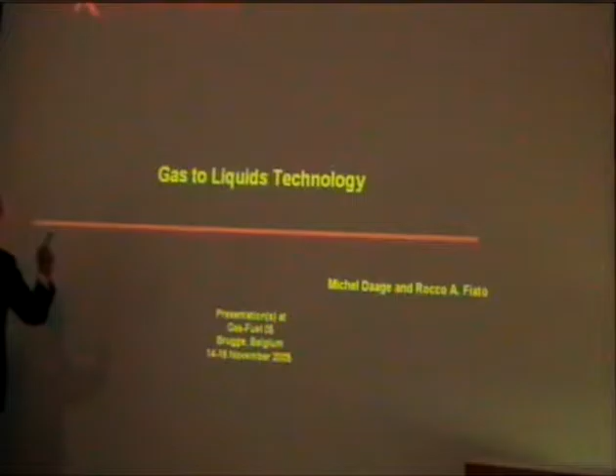I would like to acknowledge my co-author, Fiato, who has been quite a bit on the circuit talking about the work we are doing in gas to liquid technology. I would also like to thank Theo Fleisch this morning because he covered a lot of the introductory material that I needed to look at, and he's going to simplify my job today.

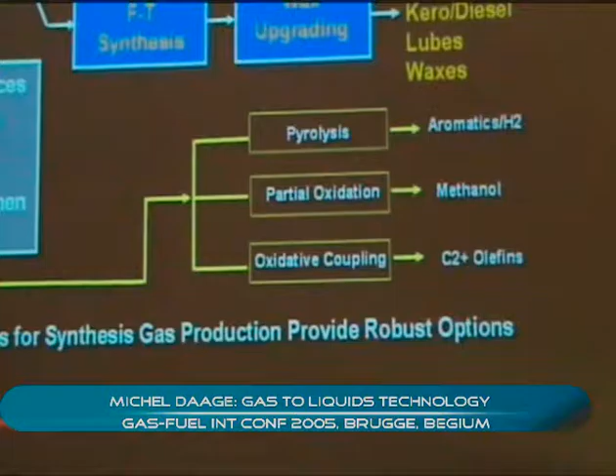This first slide, in fact, is one of his last slides. I use it to show you that essentially the conversion of gas relies on the first step, which is the partial oxidation to form the syngas. One of the big advantages in the conversion is the fact that this common intermediate in the technology is very flexible and can utilize different carbon sources.

The alternatives from that syngas are two major options. One is methanol synthesis and the manufacturing of petrochemicals, which I'm not going to cover today. We heard quite a bit about that yesterday and this morning.

The other alternative is the Fischer-Tropsch synthesis and wax upgrading, which essentially target the production of fuels and lubricants, the area of interest to ExxonMobil, and this is what I'm going to cover this morning. Finally, there is direct activation of methane, but at this point it's way too early to even approach reasonable economics, so I'm not going to discuss that approach today.

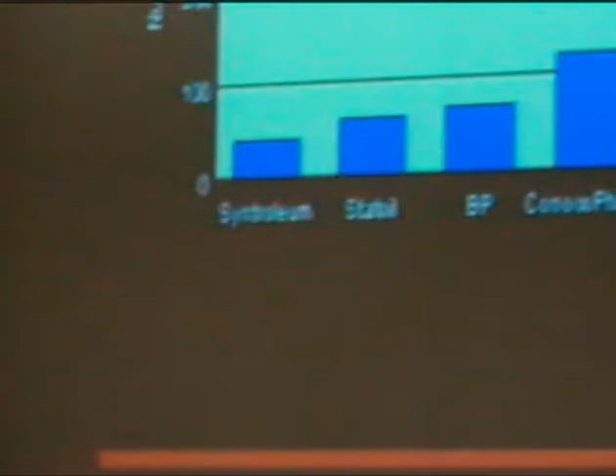When you look at the GTL technology, the thing that is really critical here, and I would like to emphasize, is the importance of improving technology. This is a requirement for obtaining attractive economics, and a lot of work has been done in that area.

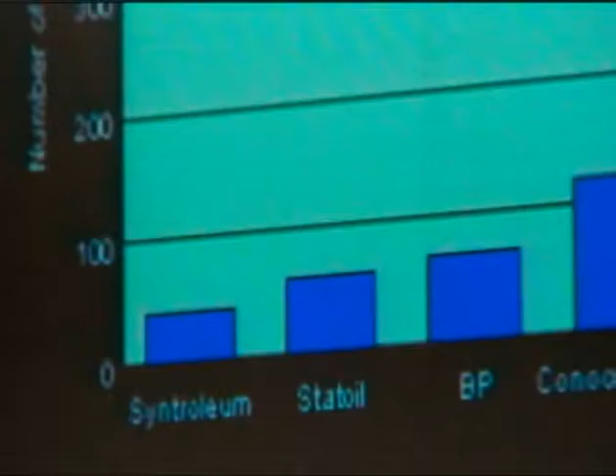In fact, the industry, we estimate that since the 1980s, more than $2.3 billion have been spent developing that technology. This shows you how important it is to the economics and how we can achieve commercialization of gas to liquid technology. It is a highly competitive environment.

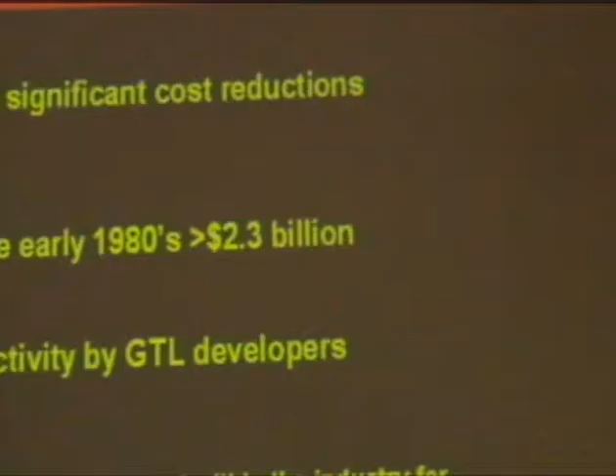You don't spend that kind of money if you don't believe that there is a lot of money to be made, and everybody wants a piece of the pie.

The chart that you see here at the bottom shows you the activity related to patents, and you can see there is a large number of patents, and ExxonMobil is the major holder of this intellectual property.

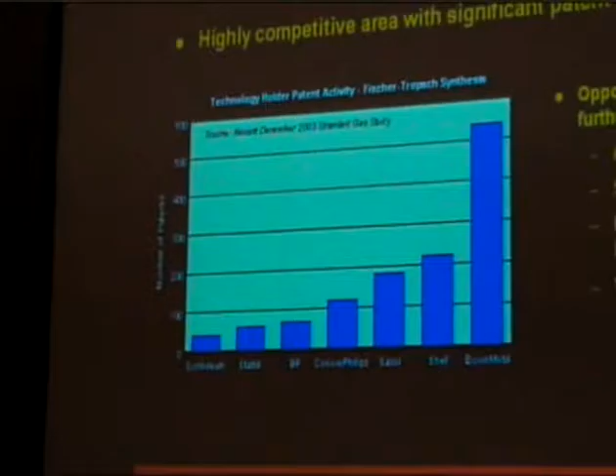The industry has widely discussed, argued, and tried to secure improvements to the technology. There are many opportunities that have been identified, especially in the case of air separation, which is critical for the production of syngas.

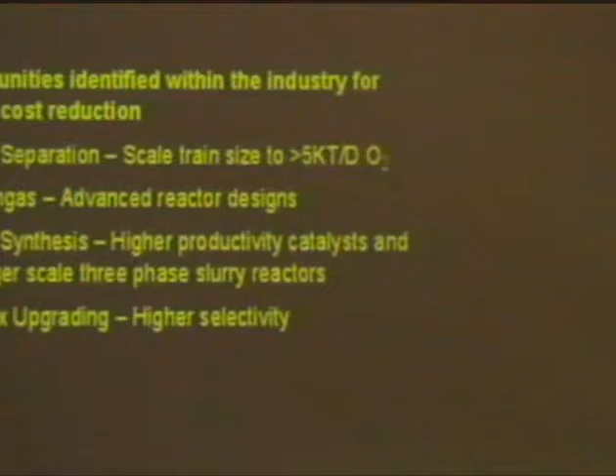On the syngas side, you heard Topsoe describe the ATR. There are other groups that are looking at advanced reactor design, and that area is also extremely competitive, even though there are many competitors and companies available out there.

On the Fischer-Tropsch synthesis, the key, as we believe, is related to obtaining a high productivity catalyst and the ability to use very large-scale three-phase slurry reactors. I'm going to talk a little bit more about that.

And finally, in order to make a product that you can sell, you need to upgrade that wax, because the wax market is very small. Just to give you an idea, on a large GTL plant, a leak on a flange is enough to cover the production of the whole wax market in the US.

So you see, you're not going to commercialize the wax, you're going to need to transform it into a very large volume product, and that's where the fuels and lubricants come into play. In the wax upgrading, what is really essential is obtaining high selectivity. Obviously, you don't want to go back to methane, because you would have wasted a lot of money doing that.

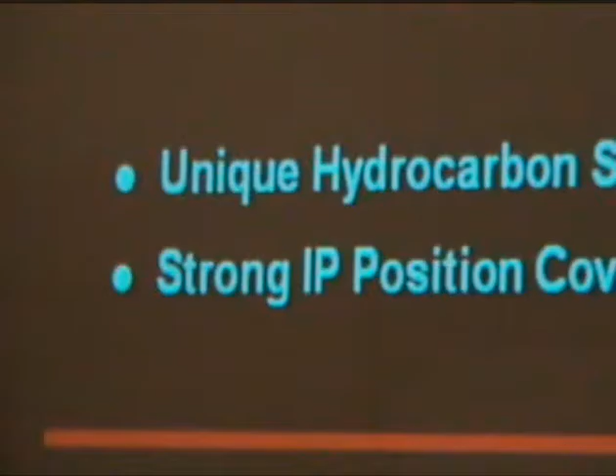The second step is the Fischer-Tropsch, where you take the syngas and convert it to a waxy material. You can see from the schematic that we're using a slurry reactor, designed specifically to manage the heat because of the high exothermic reaction that occurs in this vessel. We produce a high molecular weight wax out of this reactor using both a proprietary reactor design as well as a proprietary catalyst, and I'm going to give you a little more detail on that.

This is then followed up by an upgrading step, which resembles to some extent a hydrocracking or hydroisomerization, commonly used for the manufacturing of lubricants, even from conventional fuels. And essentially the products that we're going to make are fuels, diesel, some naphtha, lubes, which have a higher value than the fuels themselves, and obviously opportunity for some specialties such as solvents in here.

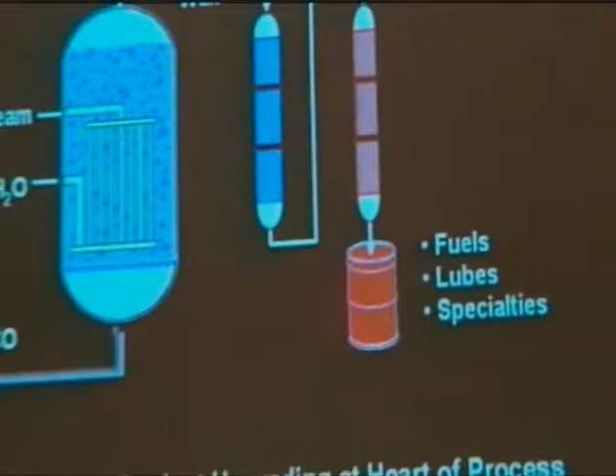The uniqueness of the process that Exxon is using is really tied to both steps here, which is the use of the slurry reactor for the Fischer-Tropsch synthesis, as well as the upgrading, and the company possesses a very strong IP position in that area, which covers 3 things: the catalyst, the process itself, and also the product composition.

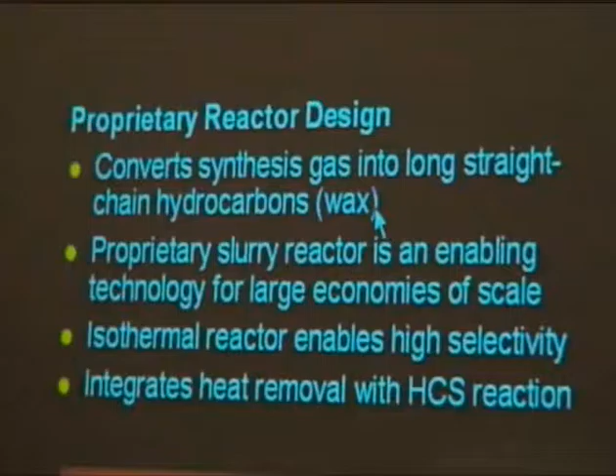Let me focus a little bit more on the Fischer-Tropsch synthesis. We use a proprietary reactor design, and in that step we convert synthesis gas into long straight-chain paraffins, essentially wax. It's a very clean product, white, a beautiful candle. If you had the chance to see this, it's really pretty amazing to see the kind of material that you make out of this.

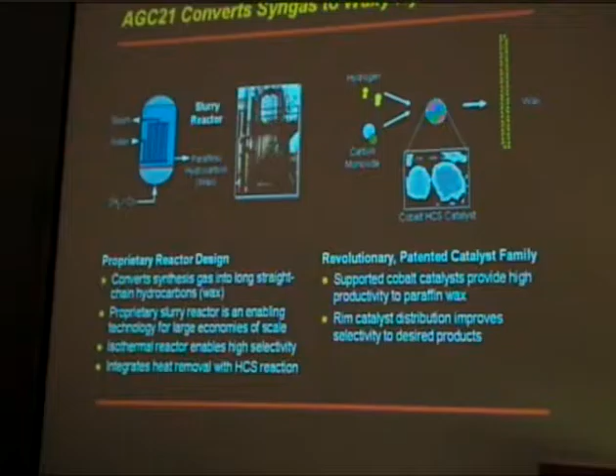The slurry reactor that we use is essentially enabling the technology for our large economy of scale, and that is where the slurry presents a significant advantage. It is an isothermal reactor, and it enables us to control the selectivity of the reaction and essentially produce a very high quality wax. The key element of this slurry is controlling the hydrodynamics in the reactor.

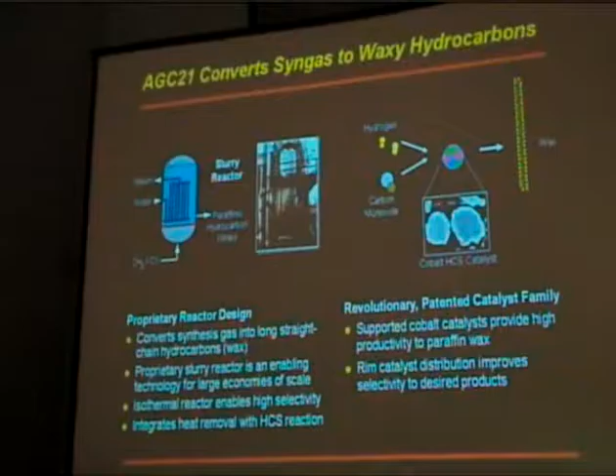That is tied to the formulation of the catalyst and its morphology, and also controlling the heat removal, which the liquid phase allows for very good high heat transfer capability in the reactor, where we remove the heat by evaporating the water, shown here on the reactor on these grids of tubes that are inserted inside the reactor.

On the catalyst side of it, you have here a cartoon representation of the chemistry. I don't think that anybody finds this maybe informative, but not that exciting. The key element is really the cobalt HCS catalyst, which is represented here.

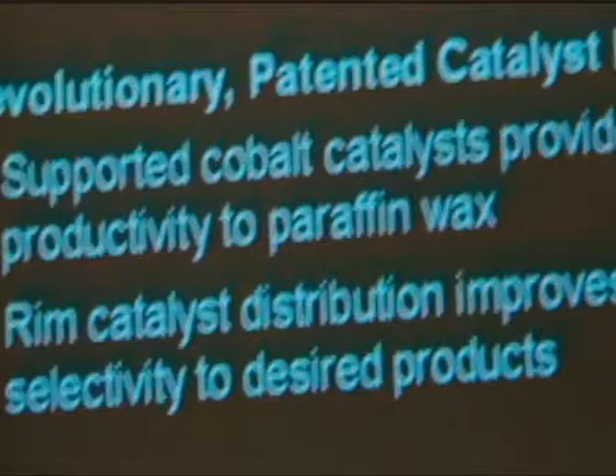We believe our catalyst is revolutionary and it's highly patented. It is a supported cobalt catalyst that provides a high productivity to paraffin wax. And this is really essential to your economics.

So it's a very sophisticated system, and in particular you will notice that this catalyst, we call them rim catalysts, it's a distribution of the cobalt distributed in the particle, which in fact allows you to control the selectivity of the reaction. You can see here the light layer around there is where the cobalt is distributed in the catalyst, from that particular catalyst.

Why is this so important in the design of this catalyst? It's because if you try to study the effect of the thickness of that layer of cobalt in the catalyst particle, what you're going to notice is that the thickness that you need to use in the catalyst depends on the productivity of the catalyst.

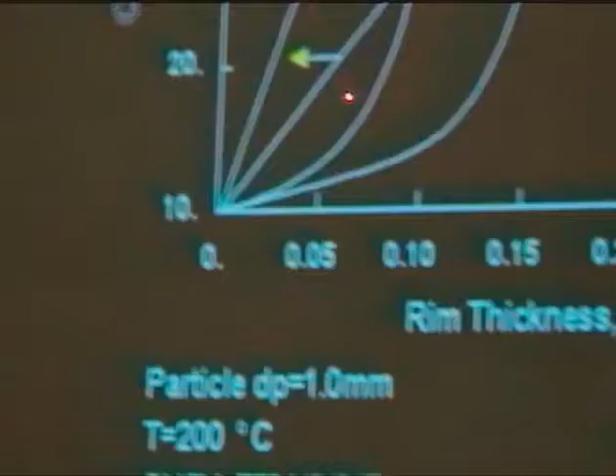If you have a low productivity catalyst, which is this line here, on yellow, you will notice this is your production of C5 plus materials, and here you have the methane selectivity. You can see it's somewhat delayed with the thickness, but catches up very rapidly and increases rapidly. Here you're making in excess of 9% methane, and every percent of methane that you make is a waste of money, because that's what you started with in the first place.

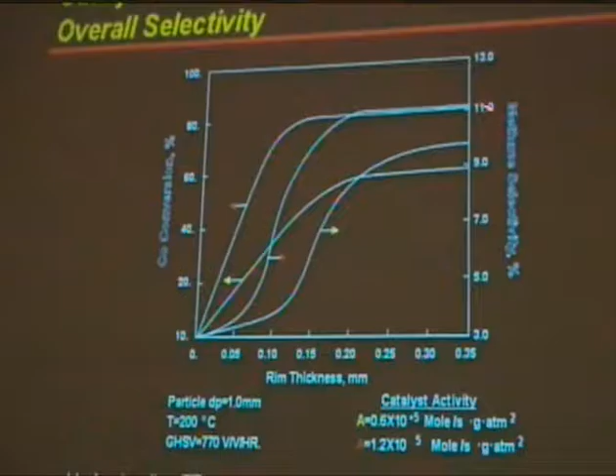If now you try to increase the productivity of the catalyst, which you see with this curve here, on a high productivity catalyst, you will notice that the methane catches up much faster and the yield becomes higher. Then you notice that you need to control the thickness of that layer in order to maintain the high selectivity in your process.

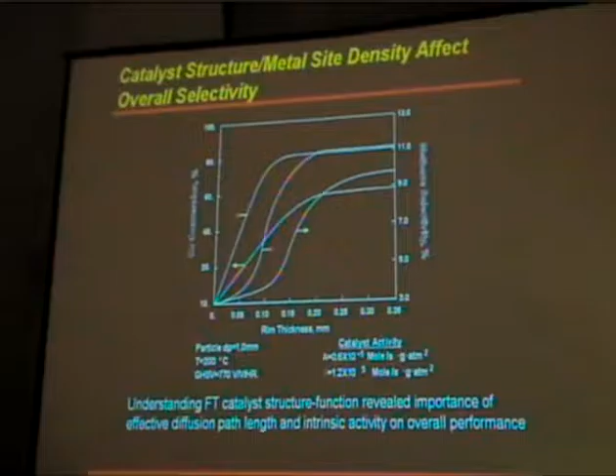So understanding the Fischer-Tropsch catalyst structure and function is really essential, and it is related to the effective diffusion path length and the intrinsic activity of the catalyst. This is an effect that is very often ignored in the formulation of catalysts, and it's really critical.

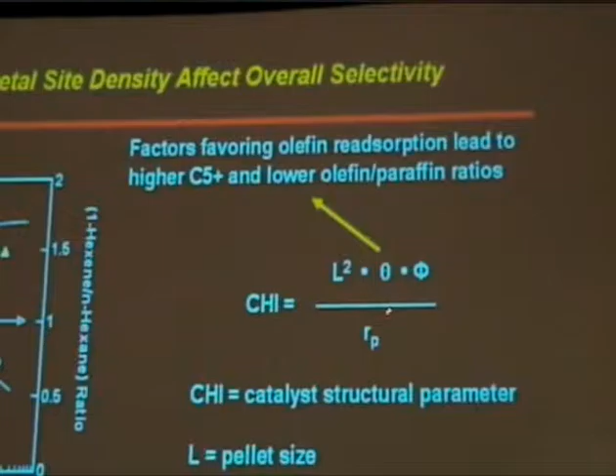Another way to look at it is to look at what ExxonMobil has defined as the chi factor, which is represented here. That has to do with the morphology of the catalyst, the activity of the cobalt, the volume of the particle, and the size of the pore.

If you look at it as a plot as a function of the value of chi, you want this value to be as high as possible. What you notice is that the selectivity in C5 plus increases dramatically, can be up to 90%, and at the same time your ratio of olefin to paraffin decreases.

This is because in this regime, you're allowing for the readsorption of the olefin, which allows them to grow again in molecular weight and increase the overall yield into the wax.

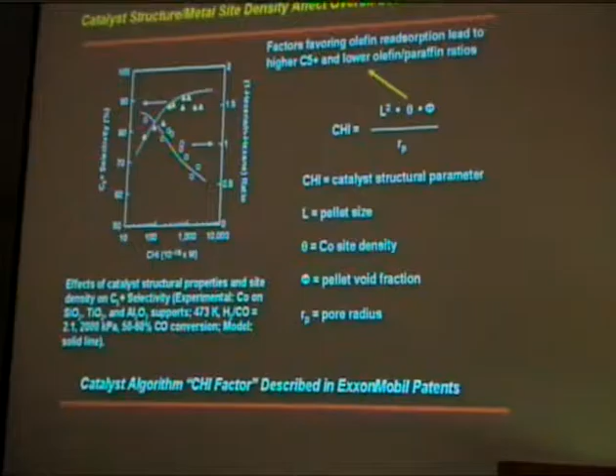The essential issue here is really to control the diffusion path, and in a high conversion regime, what happens is toward the center of the particle, if you still have cobalt, you have a hydrogen-rich environment, which leads you to the formation of methane, and that's what you try to get around.

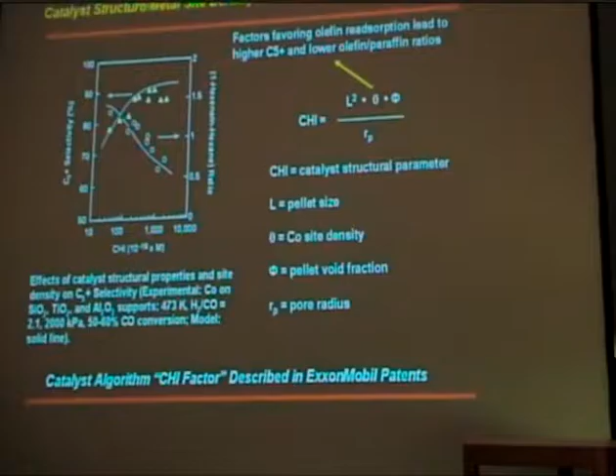The important thing about this chi factor is that Exxon has patented an algorithm related to it, and it is well described. I'm going to refer you to this literature if you want to know more, because I do not have the time to describe this effect further.

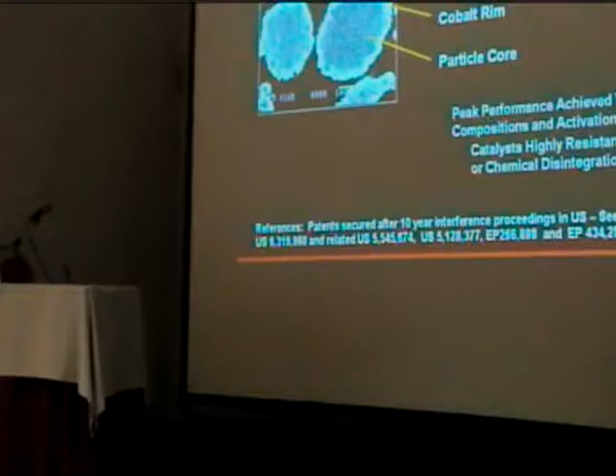Here is a picture of the catalyst that I was showing you before, which shows this rim here. I'm going to repeat a bit what I just said, which is that the cobalt rim helps minimize the methane formation, and it's obviously important in the economics.

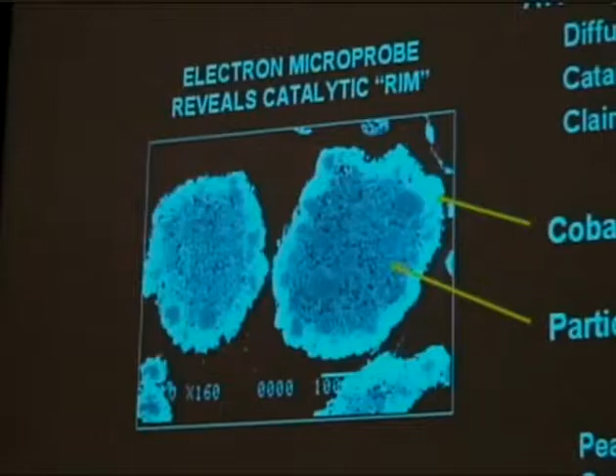It's related to the relative diffusion of hydrogen versus CO, especially when you get to the high conversion regime per pass, which impacts the economics because you minimize recycling. It also helps you manage heat control in the particle because of the exothermic reaction.

One of the things is the eggshell composition. Let me make one point: my colleague has spent a lot of time on these patents, which have been challenged by the industry quite a bit. I want to emphasize that these patents have been upheld after 10 years of interference, and ExxonMobil does control this issue on the rim catalyst.

It's very important to recognize that the definition of a rim has nothing to do with any particular shape, it applies to any shape of catalyst particle that you will use. You can use trilobes or even powders, and the rim is independent of the shape.

Another characteristic we look at in the catalyst is attrition resistance, obviously, because we are using a slurry reactor, and chemical disintegration would create a corrosion problem in a slurry reactor.

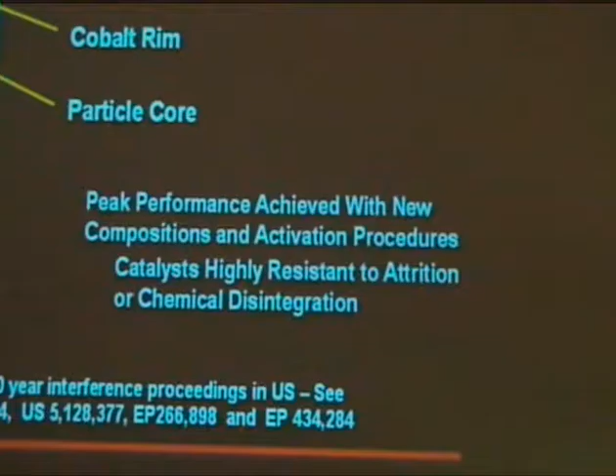Let me now switch a little bit to the issue of the products, because really what all this technology is about is making a product that you can market and sell.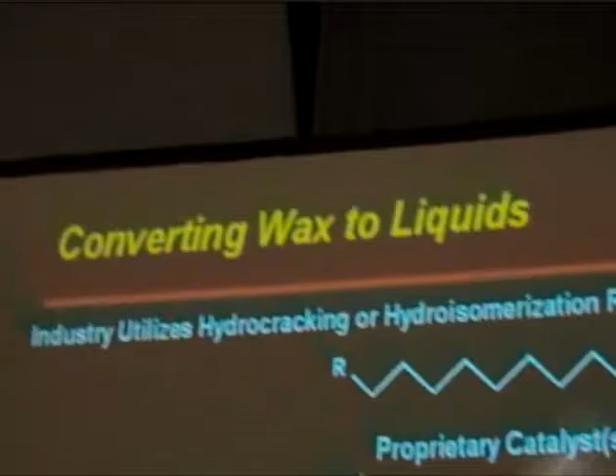The key thing is when you make wax, wax is not a market that is large enough for us to operate. What I did here is put a very simple cartoon to explain what we're trying to do in those plants. If you look at this linear molecule as being a wax, by the way, I'm a chemist, okay, just in case that explains the cartoons.

We use a series of proprietary catalysts that are essentially bifunctional catalysts, like metals on solid acids, and you change the morphology, property, and function of those catalysts in order to tailor the product that you make.

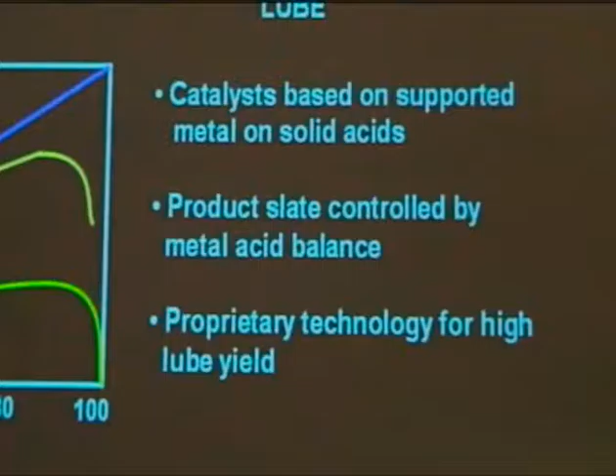In one particular case, you're going to try to favor not only an isomerization reaction but also a cracking reaction, acid cracking, so that you can control the molecular weight of the product. In this particular case, you're going to try to make diesel.

In the other cases, you're going to avoid the cracking and instead isomerize the molecule by adding branches to those chains. Those branches are going to be relatively short. It's very difficult to put long branches on these molecules.

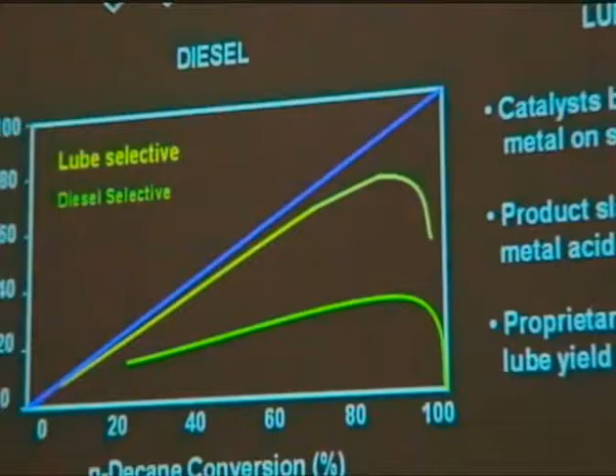When you do this, you're getting products that are in the lube range, okay? The properties you're looking for are very different. They have to do with viscosity, VI, and pour point, and for anybody involved in catalysis, it's a weird process to work on because everything is driven by physical properties, not by conversion.

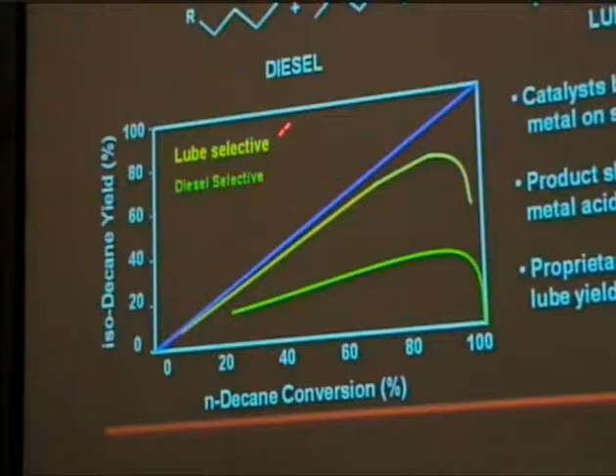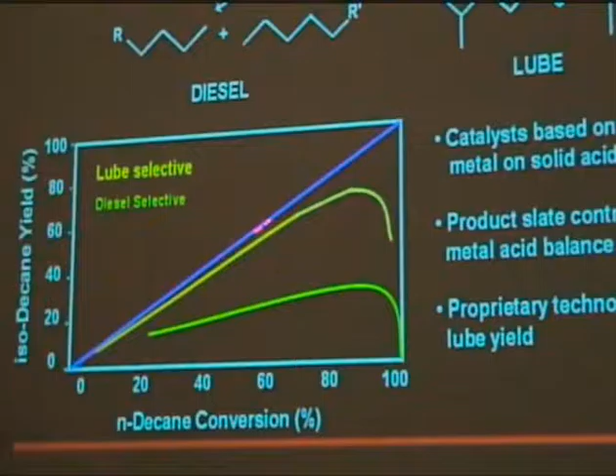Here's an example of how you select the catalyst to produce diesel or lubricants. This could be a bench scale experiment. You look at n-decane conversions for the feed used, and the production of iso-decanes, essentially methylnonane and dimethyloctanes. The purple line is the ideal conversion. You can see we're using two different catalysts with some isomerization capability, but we lose a lot of the molecules here by cracking.

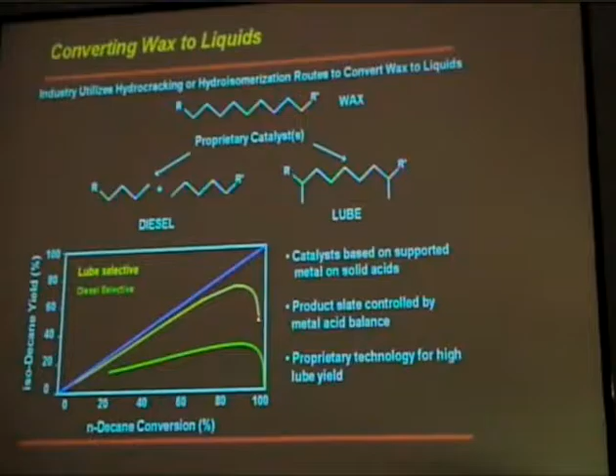So we're making lower molecular weight product. When you try to make the lube, we try to maintain the molecular weight, and we use this type of catalyst.

Let me talk a little bit about the lubes and what we're trying to achieve. May I get a glass of water?

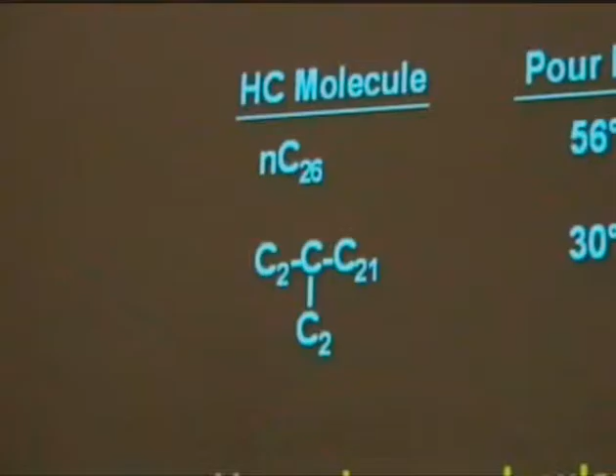In the isomerization process, what we try to do is modify the linear paraffin. Here's an example with a C26 molecule. We try to add a small branch to this molecule, and when you do this, the pour point of your lubricant changes, going from 56 degrees C down to 30 degrees. The VI doesn't change. That is the kind of reaction that gives you the lubricity.

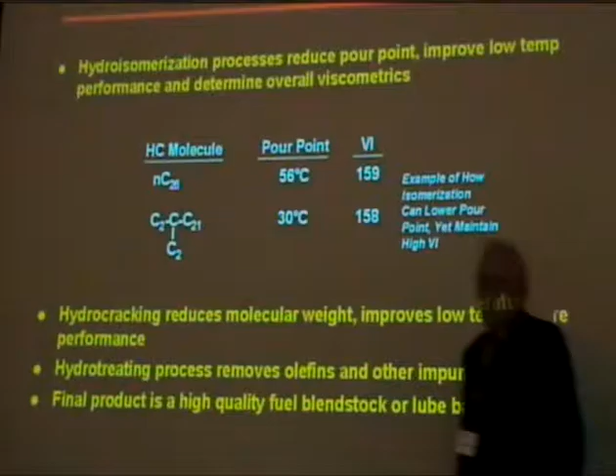And really that is what we're trying to achieve. This is very critical to be able to control the performance of those products.

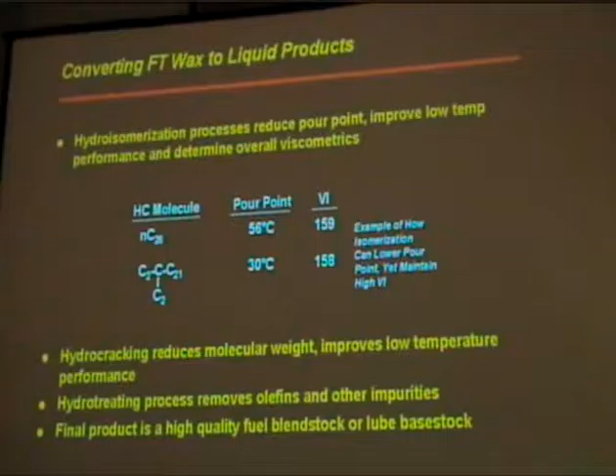In the case of diesel, what we do is hydrocracking, reducing the molecular weight and improving low temperature performance. Low temperature performance is a critical item for both diesel and lube products. One reason is if you live in a cold country, when you start the car in the morning, you don't want the crankcase to have a candle in there. That's exactly why people worry about this type of property, because if the lube solidifies, you cannot start the car.

In both of these processes, you have to add another step, a hydrotreating or hydro-finishing process, in which at a low temperature you hydrogenate the residual olefins and eventually oxygenates in some cases. You do this to stabilize the product, because you have to store it, transport it, and deliver it at the pump, and if oxidation occurs, you have a product that is not acceptable to the market.

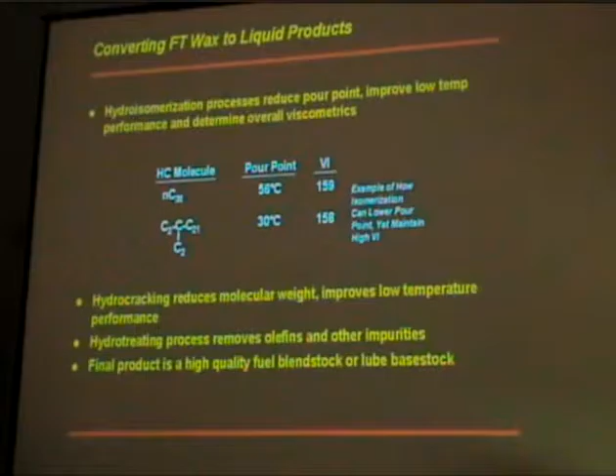At the end, the final product we make, both diesel and lubes, is a high quality blend stock material, because it comes down to formulation. Very rarely do you produce a lube that is a single base oil. It is typically a blend to which you adjust the viscosity to meet the market. So don't look at it as a final product from the GTL. It is a blend stock, especially in the lube business.

This chart shows the evolution of technology in lubricants, and I decided to include this because in many of the conferences we attend, very rarely do we talk about lubricants and lube base oil. The history here is very interesting. In the very early days, lubes were recovered from the barrel of oil through acid and clay treating, and the size of the trains were very small, up to 5 kBD.

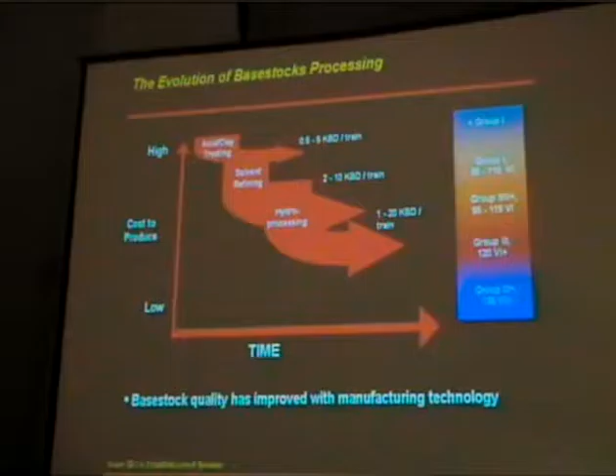In about the 1930s, the technology evolved to solvent refining, and that is what the large capacity plants use today. We produce Group 1 all over the world, including heavy base oil, industrial oils, and that kind of thing. In more recent years, hydroprocessing has been incorporated into that scheme.

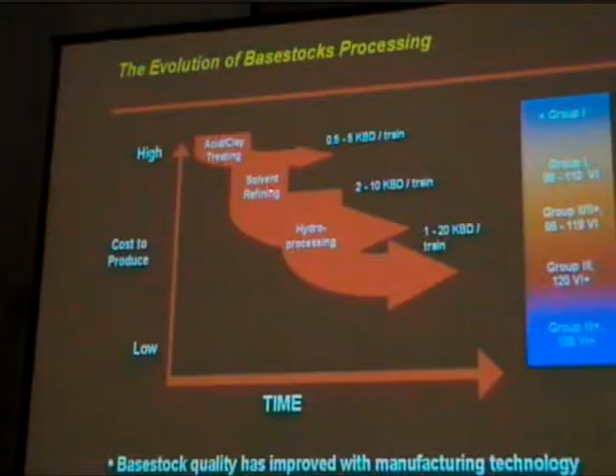What you do here is saturate the aromatics. When you switch from solvent refining to a hydroprocess system, you move from a Group 1 lubricant to a Group 2 and Group 2 plus. The major difference is you start to increase the VI and decrease the sulfur content of the lubricants, and that is also driven by environmental regulation.

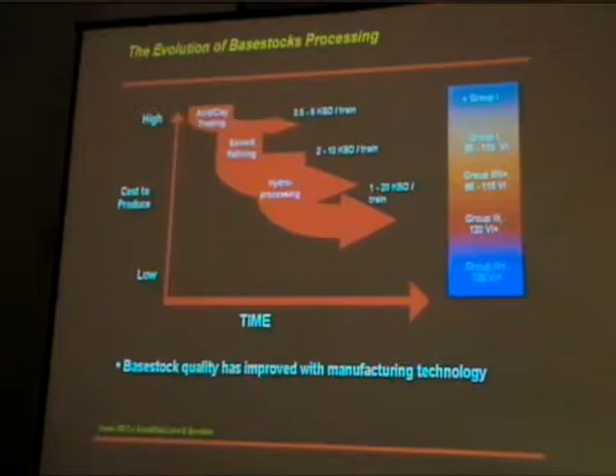Believe it or not, when you talk about less sulfur in fuels, the sulfur that exists in a lubricant starts to be a factor. This shows how deep the control of regulation impacts the fuel and lube industry. Finally, the most recent development, happening in the 90s, is essentially all-catalytic plants that have allowed the production of Group 3, which is very high VI, above 120, and essentially no sulfur.

And this is where most of the investment in industrial lube is being done today. So what is next and where does GTL fit? It fits right there. It is the next technology, and that is the highest quality lube base oil that you're going to be able to manufacture out of GTL.

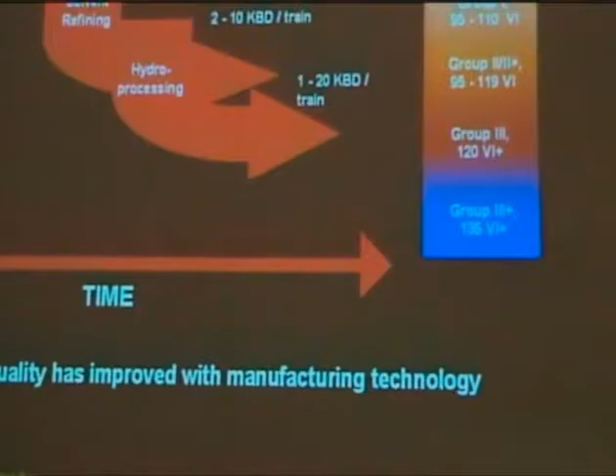So it is the next generation lubricants. And you can see here that I describe it as a Group 3 plus, 135 VI. This becomes competitive with the polyalpha olefin business, and the big advantage is this is a much cheaper technology to produce that kind of material.

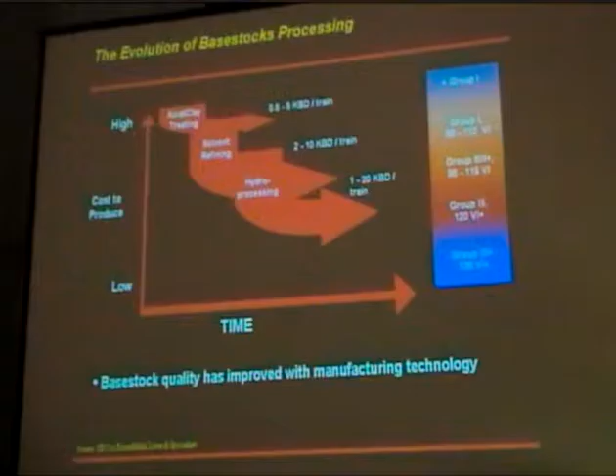How do we do this? We use a technology that we call MSDW2, and MSDW2 is a leading technology for hydroisomerization today in the market for conventional lubes, and it is applicable to GTL, and that's what we're going to do.

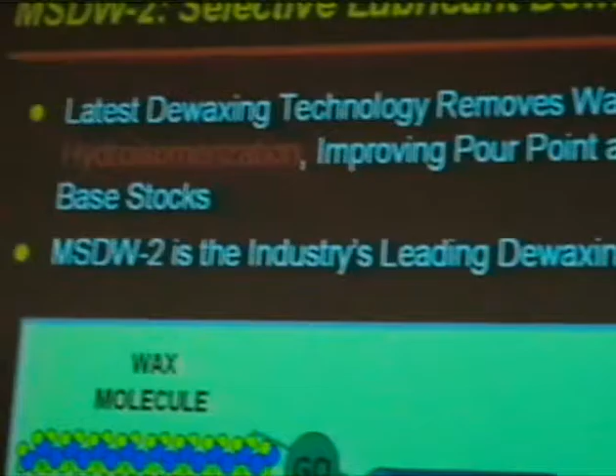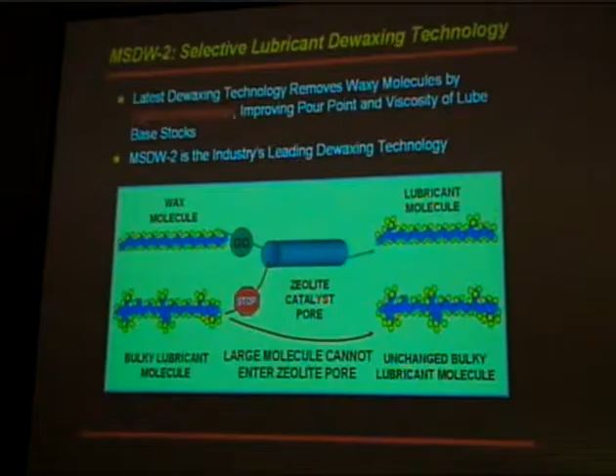These catalysts are very sophisticated and highly proprietary, and unfortunately I cannot describe the details. But the bottom line is you control the diffusion of the wax molecule, which has a small critical diameter, which can go into the pore where the isomerization occurs. When the molecule becomes bulky, it does not penetrate into the catalyst.

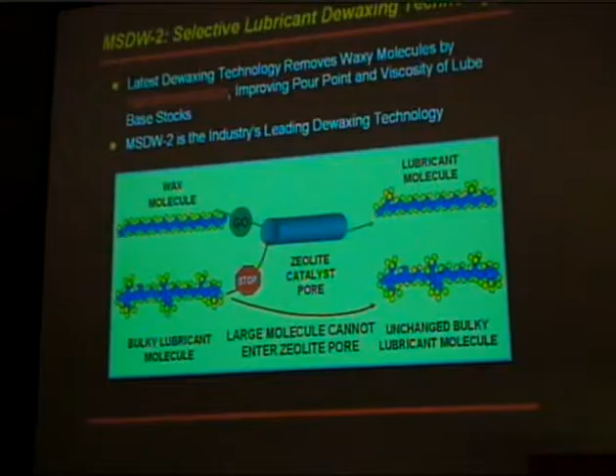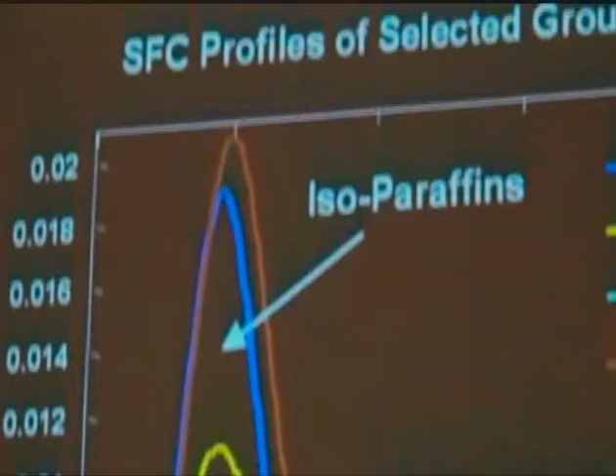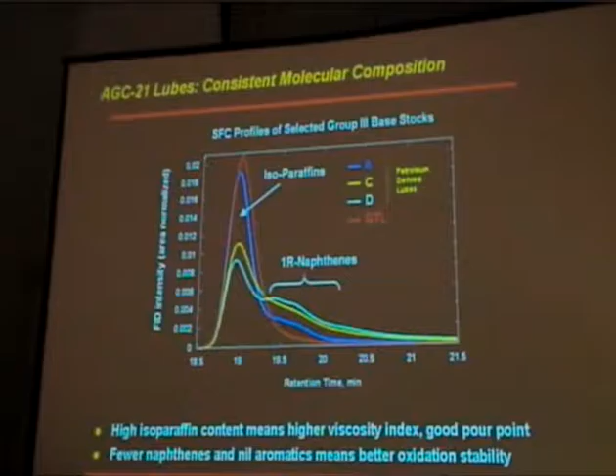The products labeled C and D are competitors' Group 3 products, which contain a significant amount of naphthene. The things labeled A here, I can tell you, are our product - our Group 3 product, the Visom that was produced at Fawley by isomerization of slack wax.

And the GTL lube, essentially when we treat this type of material, gives you the red curve here. And you can see that the naphthenes are essentially absent. This is a characteristic that allows us to make this extremely advanced lube and very high quality material.

The thing that is important to recognize is that the fewer naphthenes and aromatics you have in your lube, the more stable your lubes become. It is not sensitive to oxidation, and it's a critical property in order to be able to sell this material.

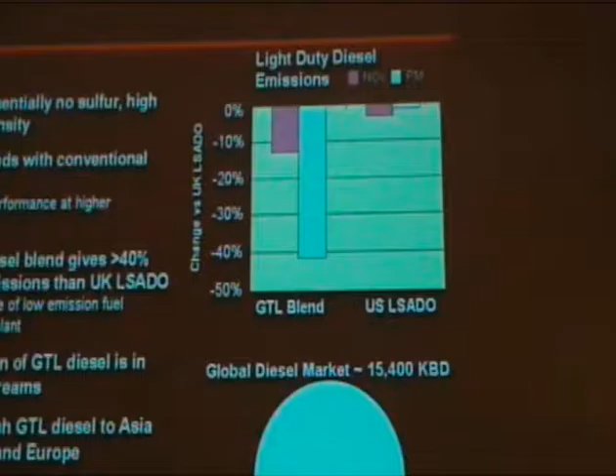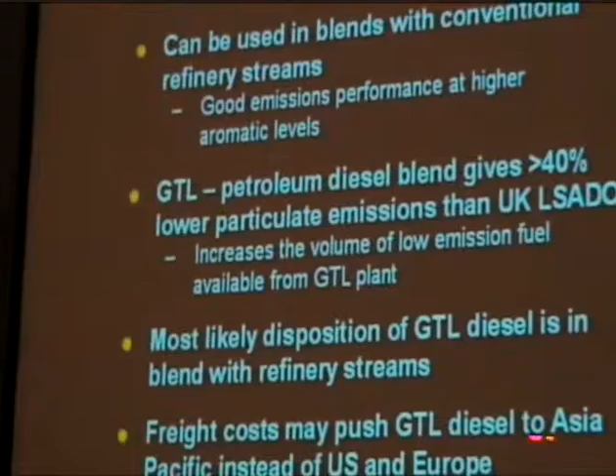Let me switch a little bit to the diesel. GTL will produce a very good product. A conventional diesel has about a cetane of 45, and the regulation is pushing for higher values. It can be as high as 50.

The sulfur in the conventional diesel today in the US is about 330 ppm. Obviously this is going down, and the regulation is going to push you to produce diesel with 10 ppm, which requires significantly higher volumes. You can see that you already achieved that from AGC-21.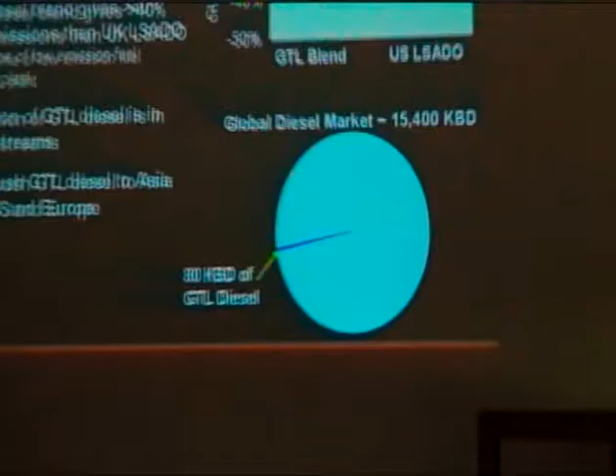The specific gravity goes down, and this is also recognized as decreasing the emissions. The flash point remains very acceptable, and the cloud point is also acceptable for selling this product. The cloud point depends on the region where you're going to sell.

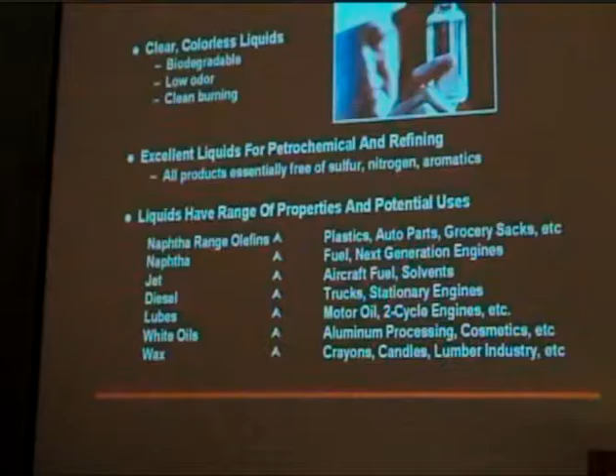Let me give a little bit more background on that GTL diesel. One of the things that's very attractive in that material is the reduction in emissions. Essentially, when you compare GTL diesel, you can see there's a significant reduction in NOx emission as well as PM, and this is a critical item.

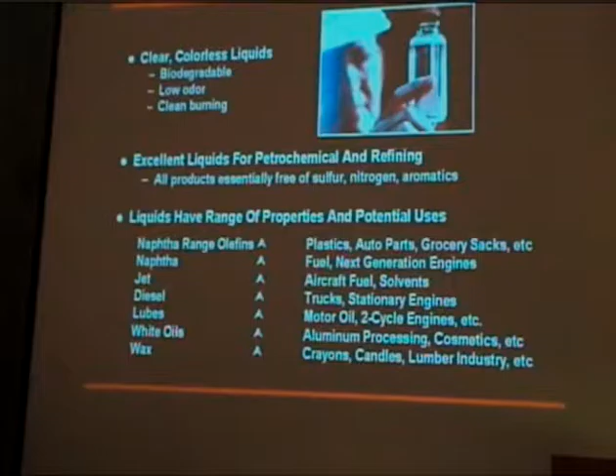One of the things that is very interesting is that those credits are still maintained even if you blend that type of material with conventional diesel, especially the UK LSADO, the low sulfur automotive diesel oil.

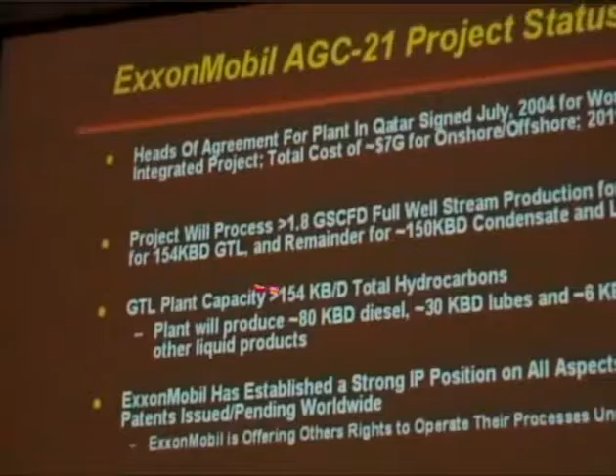I think the use of GTL, because it has so many good qualities, is being used as a blend with refinery streams. That will allow maintaining the production of diesel, which is under stress in the Northeast.

The freight cost may push the GTL into other areas, and that's related to the economics. You're going to go obviously where you can make the maximum profit, which is the cheapest way of producing diesel.

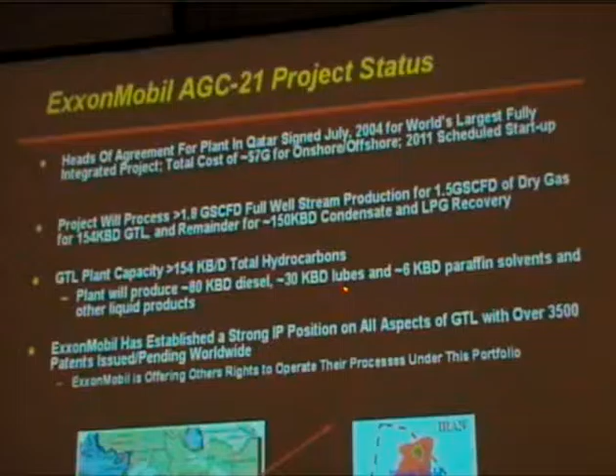Let me remind you that even though the capacity in diesel that people are investing in seems huge, here's what the Qatar plant represents: we're going to manufacture about 80 kbd of GTL diesel, and that's what it represents in the global diesel market. So there's a lot of room for that product and much more investment possible if you can justify the economics.

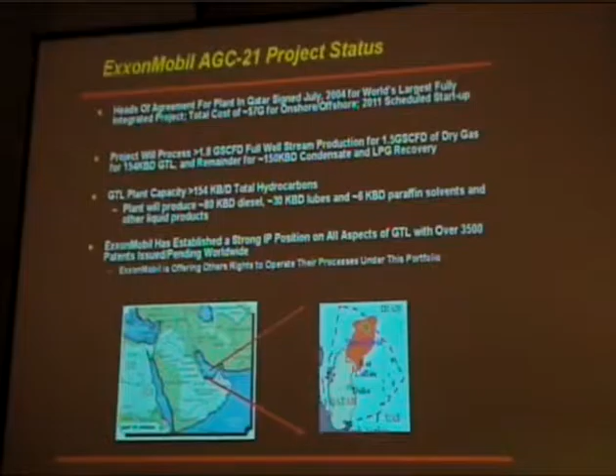Let me mention a few other things. One of the key characteristics of the GTL product is that they are clear, colorless liquids. They look like lube, look like diesel, look like naphtha. They have no odor, no sulfur. It's like baby oil, and they burn clean. I think it's a very unique property of this type of material.

They're excellent feedstocks for petrochemicals and refining. This is why there are many other uses outside of diesel and lubricant: naphtha range olefins which can be used for naphtha cracking, jet, white oil, and wax for specialty applications. One not listed here is use as solvents and specialty solvents.

Let me give you a quick update on the AGC 21 status. ExxonMobil reached agreement in 2004. In fact, it was on Bastille Day, being a Frenchman, I cannot forget that. It was on July 14th, 2004.

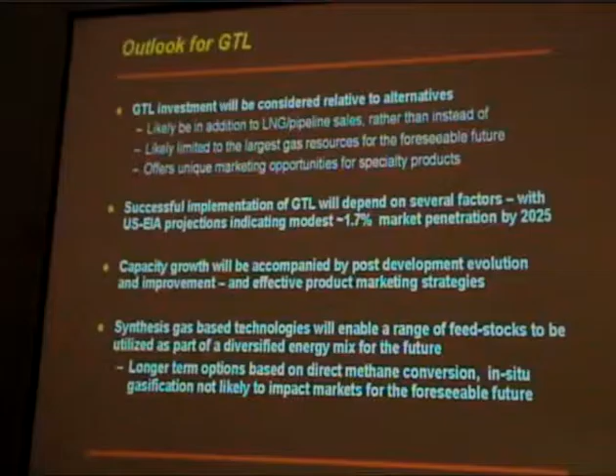The project will process 1.8 gigascf of gas and essentially produce about 154 kbd of GTL, with the remainder being condensate and LPG recovery. The integration with this condensate and LPG recovery is essential to the economics. This is why those plants are so complicated.

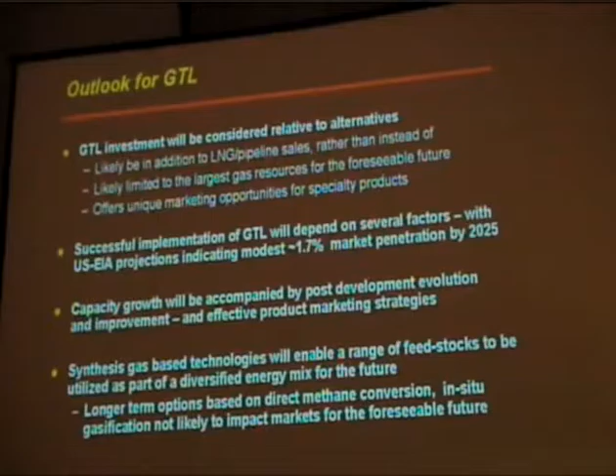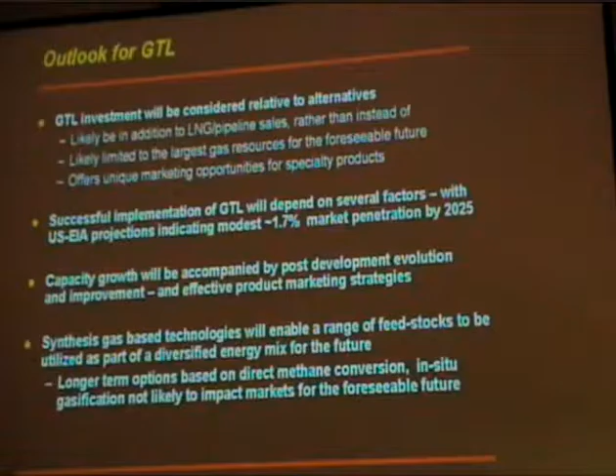Out of this 154 kbd of total hydrocarbon, we'll produce about 80 kbd of diesel, about 30 kbd of lube, and this is huge because if you look today at a large-scale Group 3 lube or catalytic plant, investments are in the 15 to 20 kbd range. So this is a world-class scale lube production capability.

And about 6 kbd will be directed toward specialty products such as paraffinic solvent and also liquid products.

Let me remind you that ExxonMobil has a very strong IP position on this, with over 3,500 patents issued or pending worldwide. And I'll do my little advertising, just like we did earlier: ExxonMobil is offering to others the license of processes from the portfolio of patents we own.

The outlook for GTL: GTL investment, as everybody has to acknowledge, is capital intensive. There's a lot of money involved, we're talking about billions of dollars for these kinds of facilities. And this kind of investment will always be considered relative to alternatives, including LNG, pipeline sales, as well as other resources such as chemical production, the way Theo showed us this morning.

Successful implementation will depend on several factors. The projection indicates that it would be a modest penetration in the market by 2025, about 2% market penetration, and that is essentially driven by the penetration of the diesel market.